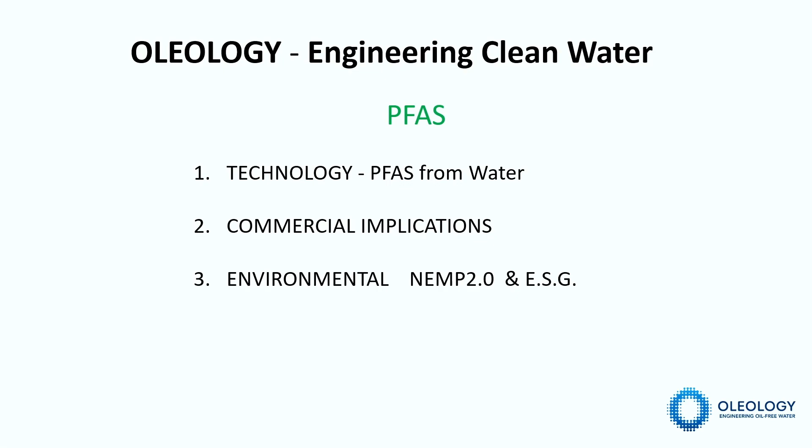So we'll look at a little bit of the technology on how we remove PFAS from water. We'll also look at how co-contaminants make a big difference in that treatment and the robustness of it, and that is a really important part. The commercial implications, which link back to the technology, the robustness of the system, and the ancillaries that have to otherwise be attached to that treatment system. And then quickly on the environmental, and I'll try and avoid questions from Jimmy because he likes to do that to me, and how ESG is having a big part to play in what we do now for all of us.

I just mentioned it, the issues of environmental versus commercial implications. And part of that, and what we talk about and what we aim to do, is achieve, I can't say net zero, even though that's the buzzword for carbon, but below levels of detection across the board. So in the minds of our clients is, do we treat to less than detectable levels? Do we treat to what's required according to our licence?

What happens for a forever chemical as a residual? How does that affect our stakeholders? How does that affect our future liabilities? And in particular, how do I deal with those things now? What is the real cost implication of treating to 99% compared to 95% compared to 90%? Is my system going to generate other hazardous wastes?

It's all very well treating the water in this particular fluid application we're looking at, but are we going to generate other wastes that we then have to consider? And the more remote we are, and we're a very big state, the more difficult it is to deal with those other hazardous wastes. How safe is the process that I've got to treat the water, and then how do I deal with those at site in the handling, storage, and transport of other wastes off-site for final treatment?

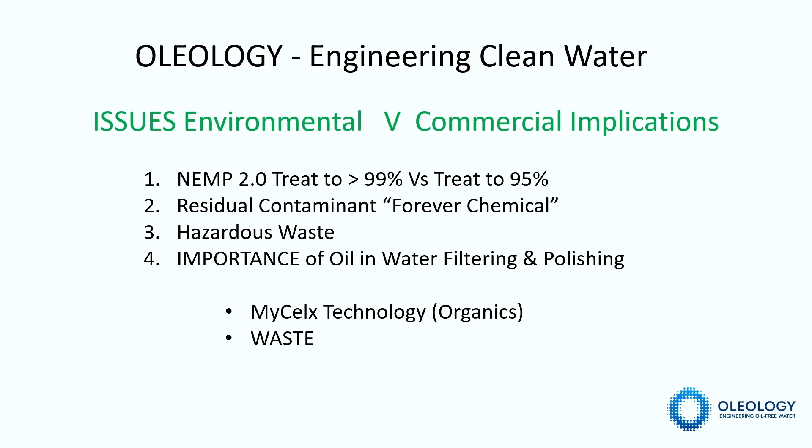As briefly mentioned before by David, PFAS is an organic. It's a synthetic organic. It doesn't occur naturally in the environment. So wherever we find it, we've made it, and we've made it since about 1930, and deposited it there somewhere. And that leads to a whole host of issues with waste. The important thing about it being a synthetic organic is that MyCelx, the product that we use for the removal of PFAS, has a very high affinity for the removal of it.

History of development, I won't linger on this, but we've been doing this sort of work since 2004 around fire training grounds.

We're now working with some of the majors in the area of water treatment, major clients, both oil and gas and mining. And we're taking this work that we've done to the US. And very interestingly, in our discussions, which have been ongoing for about 12 months with the US EPA, we now have trial equipment over there.

Their first question to us at the end of our first webinar with representatives from across the US, we had about 40 people in on the webinar from the regulator. Their first question was, what footprint do you need to treat 110 million gallons of water per day? They are very much on treating drinking water. That is their real driver.

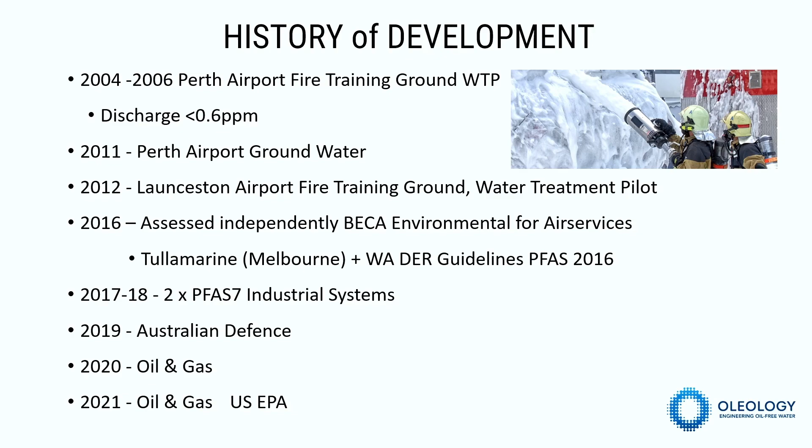Now, the important part about all of that is, in order to treat 500,000 litres of water per day, we need something of the size of two 20-foot containers. The other important thing about that is whether it's a high level of PFAS in the water, measured in thousands of micrograms, or low levels of PFAS in the water, or importantly, a fluctuation of that, it doesn't matter. The pre-treatment in the first container through the cartridge filters actually removes the high levels. We'll get into that later.

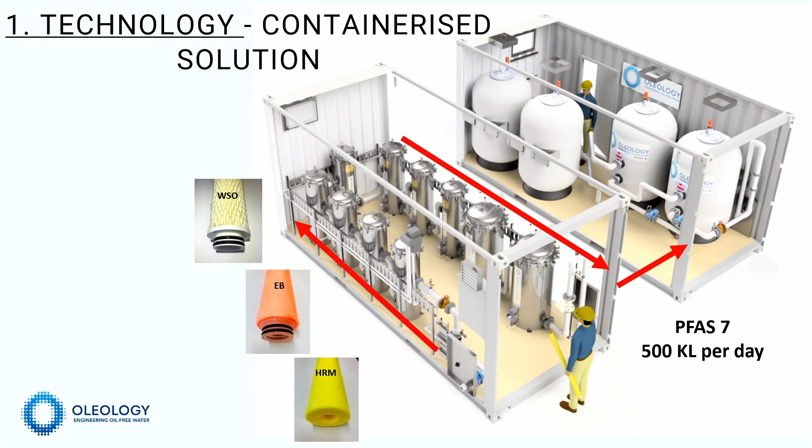Now, the one thing about the MyCelx cartridge filters is they're hydrophobic. They have a high affinity for organics, so they bond chemically the organics, synthetic or otherwise, to the filters, and when you remove them, you actually end up with a dry waste. You replace those, the filters can be safely handled and stored at site and trucked as a small quantity off-site to thermal oxidation or burial at somewhere like Tellus, as is happening in some instances at the present stage. That means the polisher lasts for a long period of time.

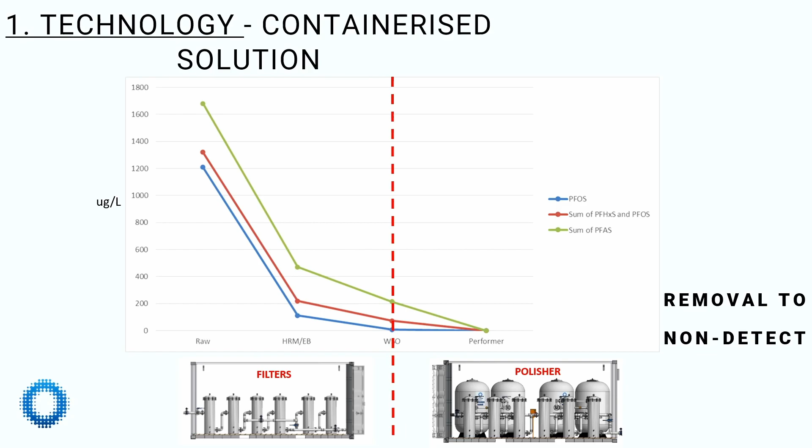But importantly, for the ancillary works that go on around the treatment, we don't have anywhere where we've had to retreat any water. And that means we don't need to have ancillary tanks, pumps, other equipment to hold to treat for batching. It's a very, very big cost and operational change.

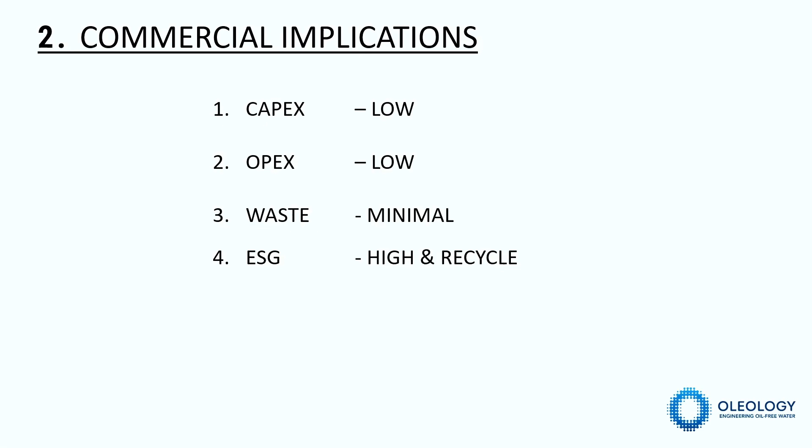So quickly, just to go through some of the commercial implications. So from the client's perspective, this is generally what they'd like to see: a low Capex, a low OPEX, and that's not only in cost of running, but the resources that are required at site and manpower, etc. A minimal waste that's safe to handle, and a high score on the ESG chart. And the possibility of being able to recycle this water as well.

So I just mentioned the Capex. Well, we build these things in small containers. It's got a very small footprint for the flow that we can handle. We don't have the need for ancillary tanks, pumps, other equipment, which also lowers not only the Capex, but the carbon footprint. The systems are delivered complete to site. We really just tie in the hoses to the container and from the container for the influent and the discharge point. It's very simple.

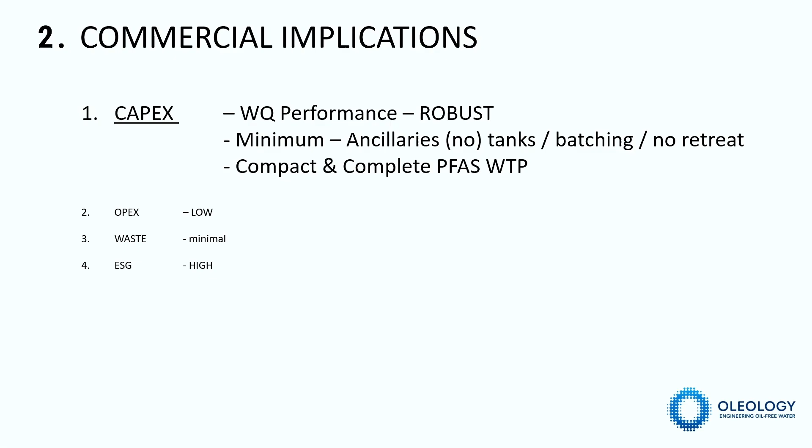As far as the OPEX goes, and trying to keep that down to a low level, we remotely monitor our systems. We've had clients in the last 18 months that have come to us and said, we want you to provide a quote for us, which will include the on-site amenities, the ability to hold people, provide crib rooms and so forth. We said, why? And they said, well, that's what's required to run these systems. We've got a large footprint. We're putting down 1,200 square metres of concrete for tanks and everything else. We said, not necessary.

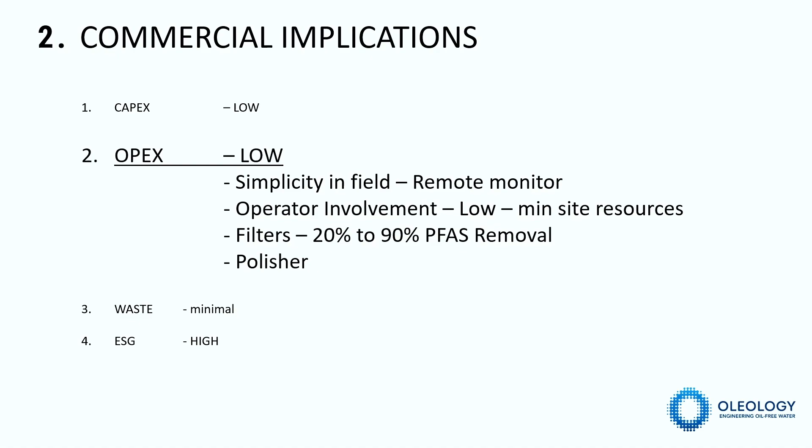We also want to have low operator involvement. So these systems are such that we have predictive analysis on when the filters will require changing. The filters account for 20 to 90%: 90% when we've got higher levels of contamination in the water, 20% when we've got lower levels of contamination in the water. The polishers have very infrequent changes. One site operating where the client has asked us to change the media, that was operating for just under 2 years before we had to change the polishing media. It wasn't spent, they just wanted it changed.

The waste is the part that I think most people have overlooked, and it's very interesting when we compare our information on what we do here in Australia with what's happening in the US. In fact, we were talking just before, Australia was at the forefront of work on regulation and guidelines, in no small part thanks to Dr. Jimmy, doing his work when he was with government here in WA for setting up the guidelines. We're at the forefront, other countries were actually looking to us.

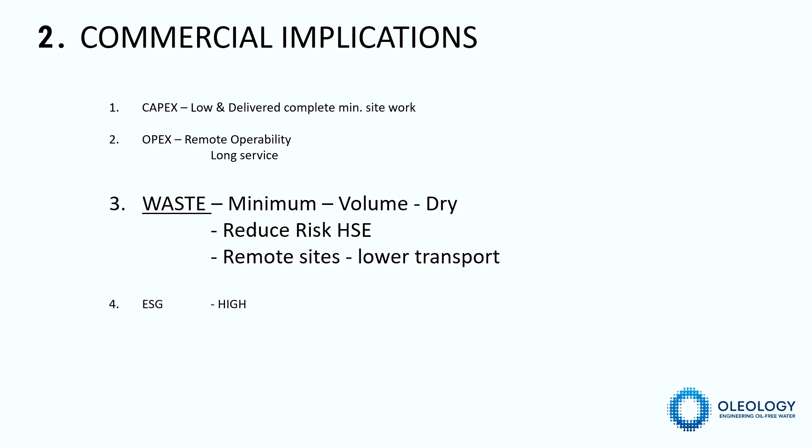Since the change of administration in the US, and probably in the last 6 months of Donald Trump's era, they have rapidly accelerated their drive to regulate PFAS now. The interesting part of all that is the waste from PFAS in the US right at the moment is not considered hazardous. That's about to change. So the proposal of what we've taken over to the US by the service implementers has been received with open arms, because the waste issue and the ability to actually move it, treat it and discharge it at the present stage is going to change dramatically in cost. Already mentioned the remote sites and how difficult it is.

On the ESG front, I guess I question why you would put in a system that only takes out selected few contaminants. We were at a conference in 2012 in Adelaide where the US EPA came and addressed the forum and spoke about the number of contaminants. At that stage there was about 2,400 known PFAS contaminants. Coming into the start of 2020, that was up at around 4,700. And just as David showed before, that's now around 6,000. It's a constantly moving field. We don't know it all. A lot of IP is still restricted in its release of information.

The ability to remove all those contaminants across the board can be done at very little additional cost in the operation in terms of treatment. As far as our treatment system goes, it'll take it all out. The client we're dealing with right at the present stage said, we only want to treat to 90% species protection. And we said, that's fine. They had internal talks. They came back to us and said, can you re-quote because we want you to take out to below detection. We said, that's fine. The system you've got will do that.

So for us, the removal of short and long chain, or the precursors that are potentially going to lead to further liability issues in future if they remain in the water, it's a bit of a no-brainer. Take them out while you're doing it, in one go. Also remove the hydrocarbons, because that's an affinity for MyCelx as well. The metals will also come out, and we do this all with a very low energy intensity.

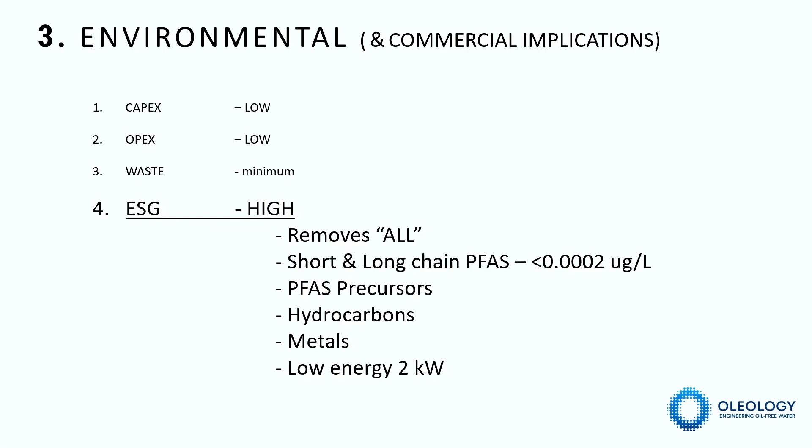This is an interesting slide given some of the information that's contained on here. And we were talking during lunch about how to view the information we have at the moment, and are we in the same position as our society was in the 60s and 70s when smoking was still seen as being a cool thing, and the nicotine companies were telling us it wasn't bad for us.

There's lots of information now that's readily available on liver, kidney, testicular and ovarian cancers. There is little doubt that it's an endocrine disruptor. Further to that, cognitive and attention deficit disorders have now been linked to it through papers published in 2016, and they're available. They're on the notes there. And unlike oil, and we all get upset when we see oil discharges and losses of containment and spills that happen on the ocean, and you can see it everywhere, you can't see PFAS. And the reason we're measuring it to such low levels is because of the impact it has. It's unseen.

The whole process of us putting this product into the ground, or not removing it where we can now, and knowing that whatever we put into the ground is going to be there for the half-life of 40 to 90 years and continue to leach out and affect our waterways, is something that really does trouble me.

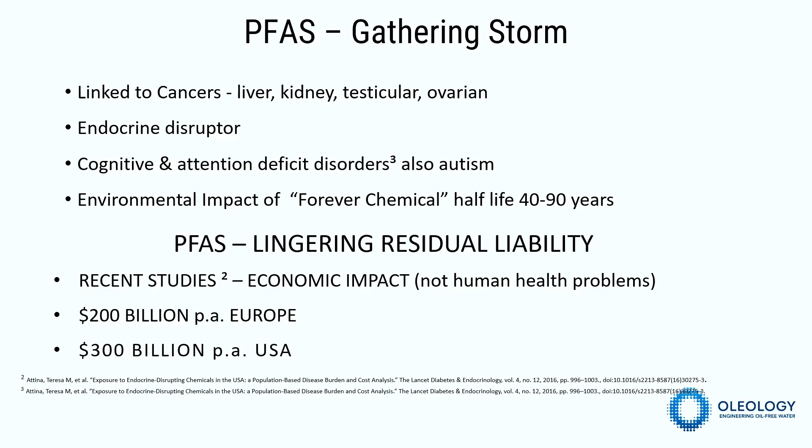The other thing that's interesting about this, and this is also in that same paper, the study points to the cost to the economy in Europe and the US, and the two numbers there of 200 billion per year and 300 billion per year are not related to human health impacts. This is losses to the economy as a result of other factors. There's just a lot to consider, and that's why I say this is quickly across the top.

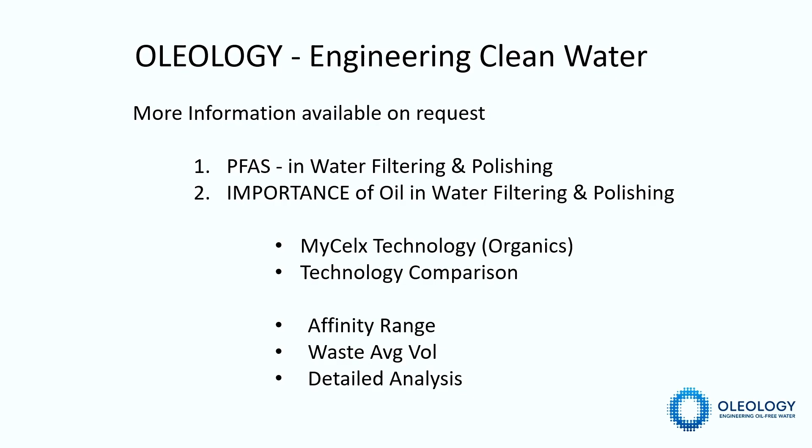Happy to take any questions that you may have. Does anyone have any questions? Oh, there it is, sorry. Jimmy, I invited you not to ask questions. No, I thought to be fair to all speakers. I'm not picking on speakers.

This is. It's actually interesting that you mentioned some of the other providers of solutions to water treatment, because I think there were 5 that you mentioned there, Jimmy. 4 of them have approached us for this technology to be a pre-filtration system for their polishing system, which is carbon and ion exchange. And we just simply said no. Because this system is integrated, we know it works well.